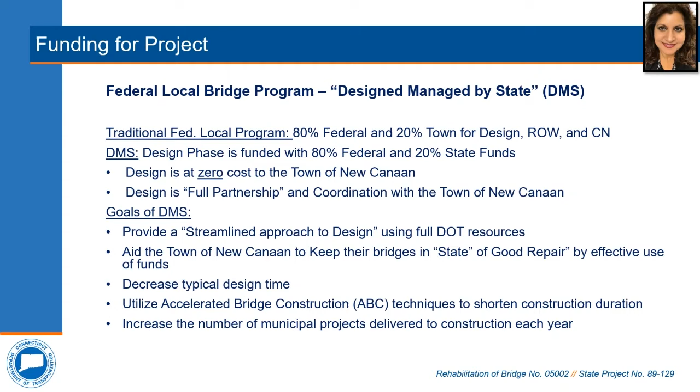The department is pleased to be able to offer this program to the town of New Canaan. The DMS program is spending your federal and state tax dollars both efficiently and effectively, and at the same time fostering great working relationships with our municipal partners. And with that, I would now like to hand it over to the town of New Canaan.

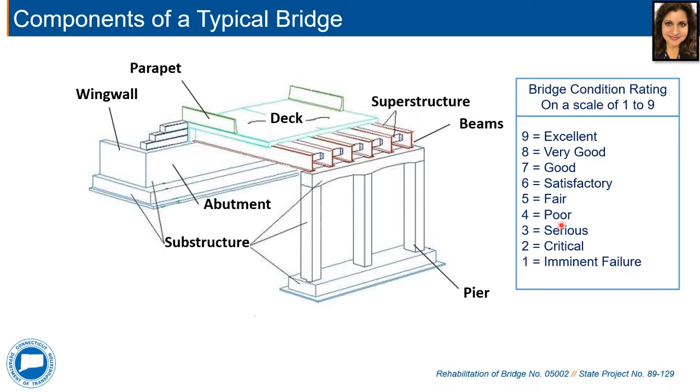Thank you, Preeti. Good evening. My name is Sean Ladati, and I will be presenting the technical portion of tonight's presentation of Bridge 05002, Ponus Ridge Road over Collins Pond in New Canaan, Connecticut.

Here is a map of the project site. The bridge is located approximately 0.2 miles northwest of Clearview Lane.

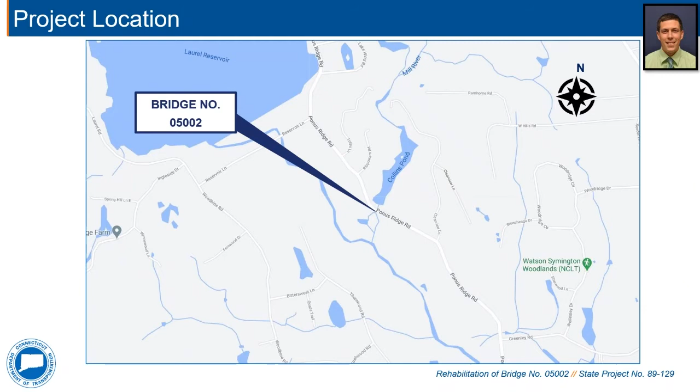This slide depicts a plan view of the existing bridge. The Rippowam River Upper Reach and Collins Pond is shown in blue, and the existing bridge is shown in orange. The existing structure was built in 1957 and is a reinforced concrete slab on concrete abutments. It has a 32.5-foot clear span. The average daily traffic, or ADT, along Ponus Ridge Road is approximately 1,500 vehicles, based on the 2017 CTDOT traffic log.

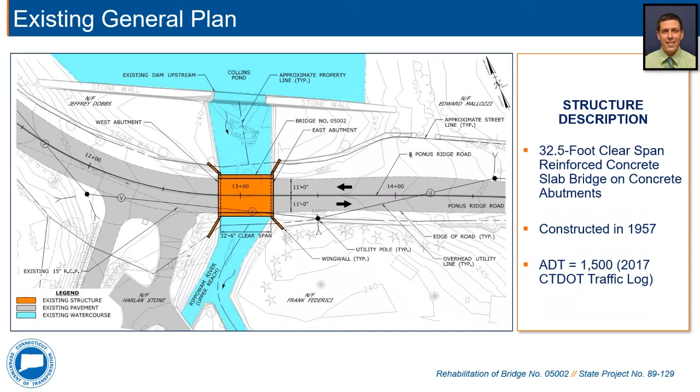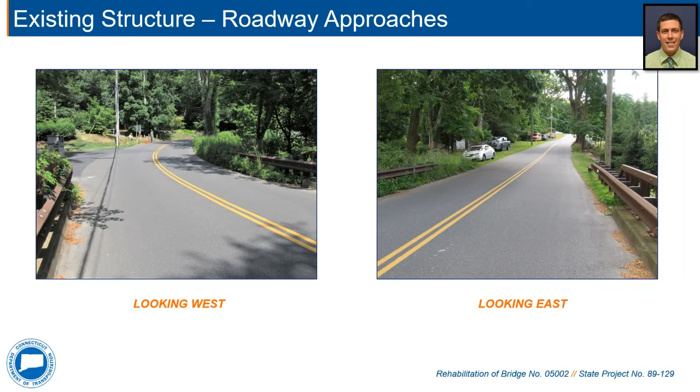This slide shows the project area at street level. In the photo on the left, we are looking west on Ponus Ridge Road. In the photo on the right, we are looking east.

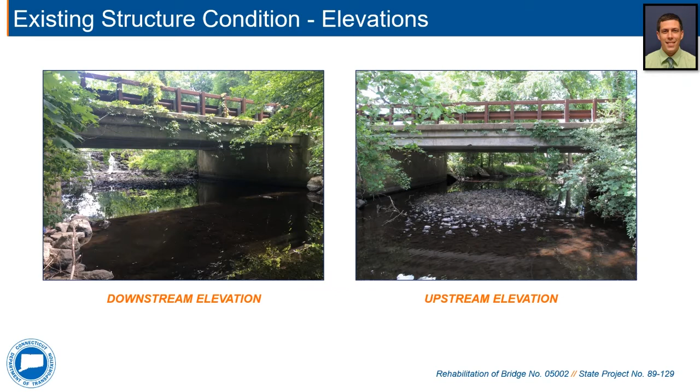This slide shows photos of the structure taken from the water. The photo on the left shows the downstream elevation, and the photo on the right shows the upstream elevation. This slide shows a photo of the top of the road and bridge rail on the left, and a photo of the underside of the deck on the right.

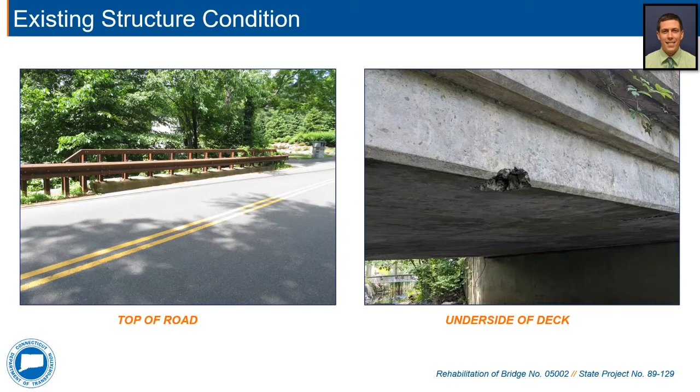The purpose of this project is to address the diminished load rating of the bridge. The latest inspection report, dated January 29, 2019, classifies this structure as functionally obsolete due to the narrow width. The deck was in good condition with a rating of 7, and the superstructure and substructure were in satisfactory condition with a rating of 6.

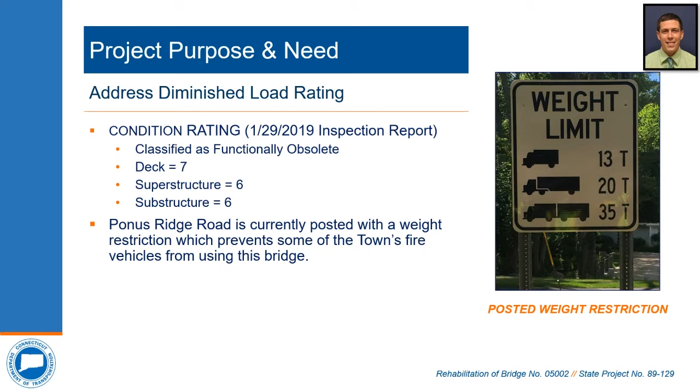Since the existing substructure was in satisfactory condition, it will remain and be repaired where required. All substructure work will occur outside of the water.

It is anticipated that 4 partial property takes are required to properly have the bridge within the town right-of-way. It is also anticipated 2 construction easements are required to the north to accommodate temporary utility relocations.

It is anticipated the aerial utilities will be temporarily relocated to the north to allow for the bridge rehabilitation. The utilities will be moved back to the original location after construction is completed.

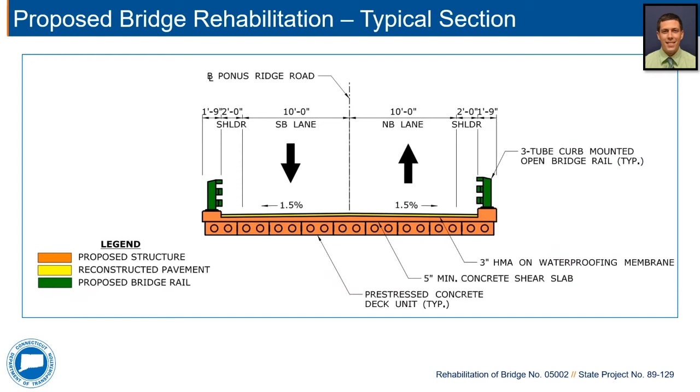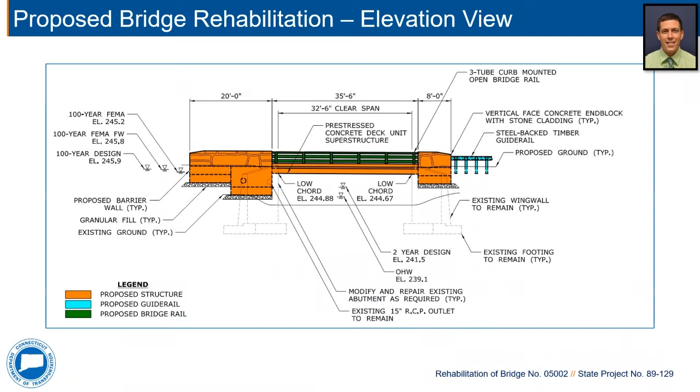This slide also depicts the 3-tube curb-mounted open bridge rail, shown in green, with vertical face concrete end blocks with stone cladding. New barrier wall and Federal Highway Administration compliant steel-backed timber guide rail, shown in blue, are proposed for each corner of the bridge.

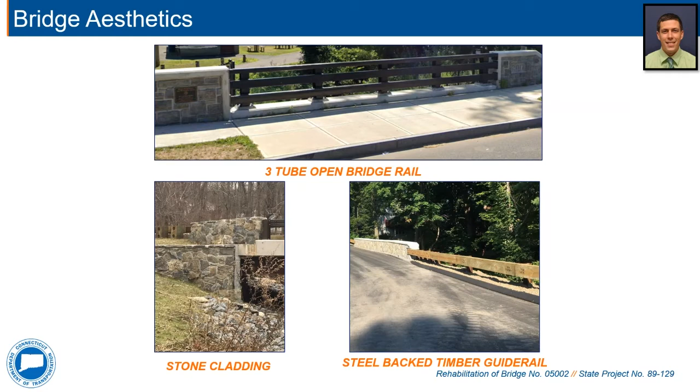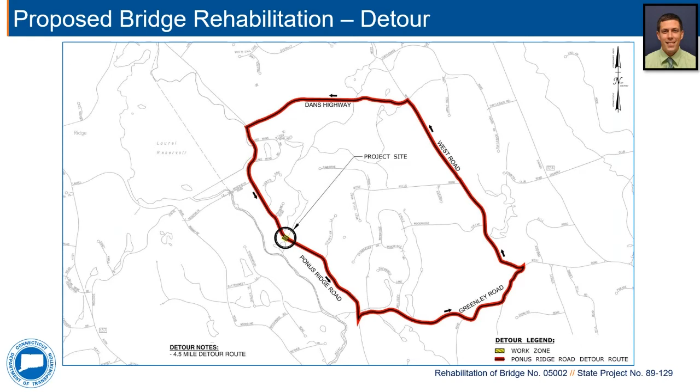This slide shows the proposed detour route in red. Traffic will be detoured along Greenley Road, West Road, and Dan's Highway. The detour route is approximately 4.5 miles long. The road closure is anticipated to have a 6-month duration.

It is anticipated that aerial utilities will be temporarily relocated to the north to allow for the bridge rehabilitation. BL Companies will coordinate with all utility companies throughout design and construction. There will be environmental permits due to the impacts to inland wetlands and the Rippowam River Upper Reach watercourse. The anticipated permits are the Town of New Canaan Inland Wetland Permit and the Connecticut DOT Flood Management Flood Certification MOU.

It is anticipated that 4 partial property takes are required to properly have all the bridge structure within the town right-of-way. It is also anticipated 2 construction easements to the north are required to accommodate the temporary aerial relocation.

I will now pass it off to Dennis to explain the right-of-way acquisition process.

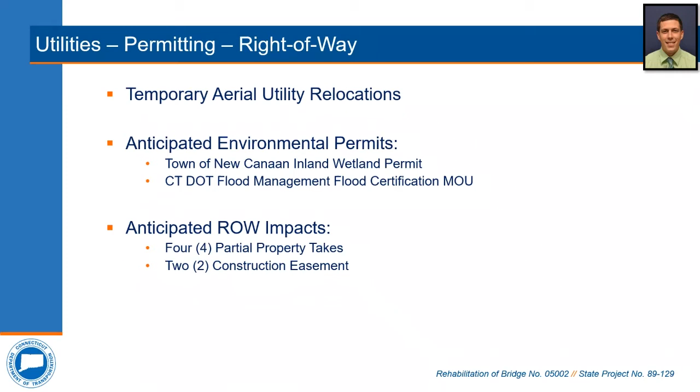So the function of the Division of Rights-of-Way is to acquire all property and property rights necessary for the project. This is done in accordance with Connecticut General Statute Section 13A-73, 13A-98E, and the Uniform Relocation Assistance and Real Property Acquisition Policies Act of 1970, as amended.

The typical right-of-way impacts include partial acquisitions, easements, and rights. Impacts are subject to change as the design progresses, but this gives a general idea of typical property impacts.

Once property impacts have been established, each impacted property owner will receive a letter of intent to acquire along with a property acquisition map. The letter essentially initiates the right-of-way process, and the map provides a detailed overview of the specific right-of-way impacts. Soon after the letter is received, the valuation process will take place, and once a value has been established, each impacted property owner will receive a written offer of compensation.

Property owners will be given time to consider the offer and negotiate should they wish. If an agreement is reached, an acceptance document will be signed, and a closing will take place at a later date. If an agreement is not reached for whatever reason, the state will utilize its power of eminent domain and acquire the property rights through the condemnation process.

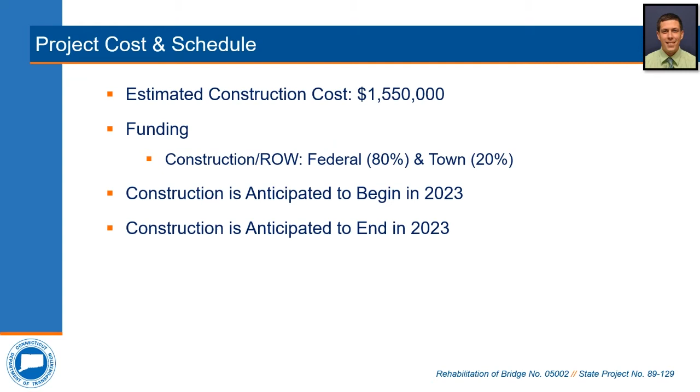Thank you, Dennis. This slide shows our estimated cost and schedule. At this time, we anticipate construction to begin in the spring of 2023 and be completed by the fall of the same year. We are currently estimating a construction cost of approximately $1.55 million, which will be paid for with 80% federal and 20% municipal funds.

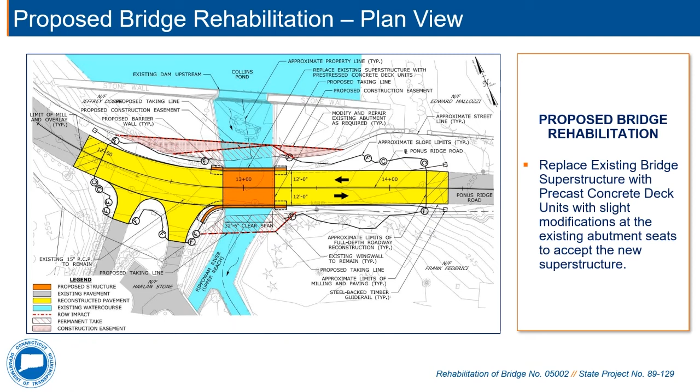We have another question: can stage construction be used instead? Sean from BL responded: stage construction was reviewed during the preliminary engineering phase for this bridge, where one half the bridge would be demolished and reconstructed while one lane of alternating one-way traffic is maintained. But due to the narrow width of the existing bridge, the temporary one-way lane would not meet the minimum required lane width. The stage construction would require widening of the bridge, which would increase construction costs, duration, environmental impacts, and right-of-way impacts. So ultimately, it was decided to go with the detour route.

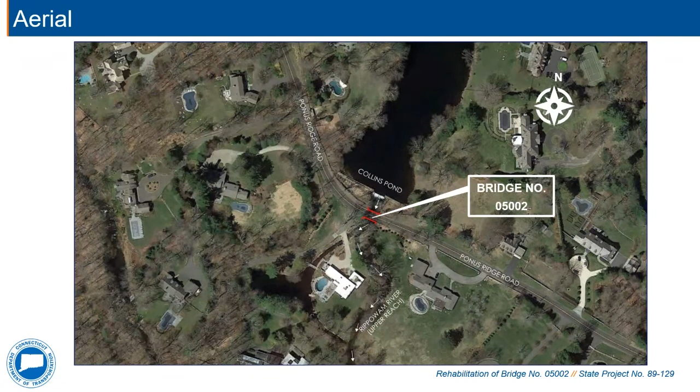Sean or Steve, would either of you please take this question? Yes, we're aware that there is a home on an island just downstream from the bridge. We did the preliminary design of this bridge to the DOT drainage manual requirements. We designed this bridge to a 100-year design storm and checked it for a 500-year design storm. There was a very minimal increase in water surface elevation at the bridge of 0.01 feet and a decrease of velocity of 0.01 feet per second. So really it's maintaining the existing flows through the bridge for the proposed structure.

Okay, thank you very much, Sean.

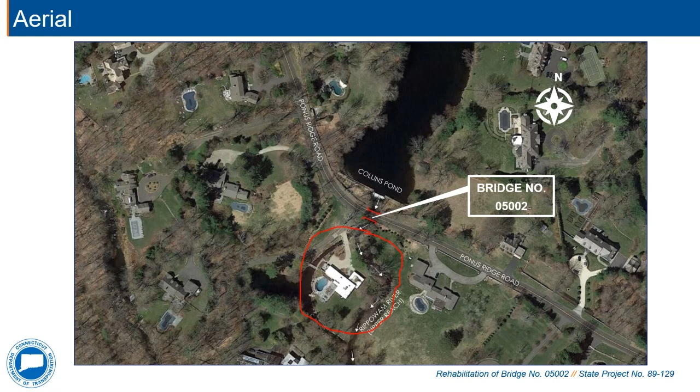So ladies and gentlemen, let's give it another minute or so. I don't see any more questions coming in.